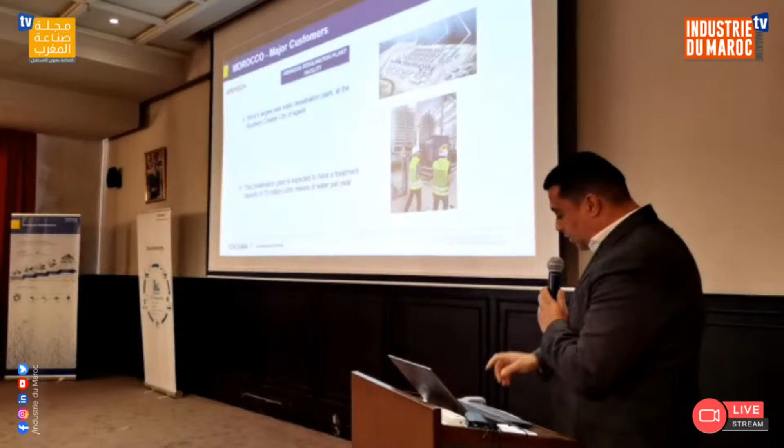Finally, in conclusion, what I would like to highlight from my presentation is that we have the local office, we have the local teams, we have enough capabilities in order to support all the projects and developments, not only globally, but also within Morocco. This means we are in a good position to support new markets, new technology, and also with a clear strategy for hydrogen and ammonia solutions.

That was all from my side, just a brief introduction to the local team, that now we are in Morocco and we have the team and the staff that can support correctly. Thanks, thank you all.

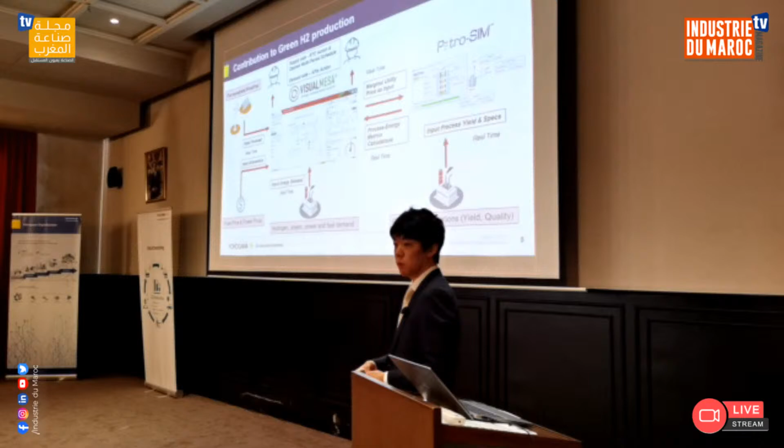Today our professionals from KBC will introduce the details. But not only the control and sensing layer - we understand there's a need for optimization and simulation so that stakeholders can study how to efficiently operate the hydrogen production plant. So we have a solution for simulation technique, and also energy management to efficiently operate your plant. We already have a concept. In the field side, we have many sensing technologies and controllers, such as flow meters, pressure transmitters, and IIoT sensors. We also have in-house AI developed by Yokogawa, which can contribute to any industry including green hydrogen production. This slide shows the electrolysis package.

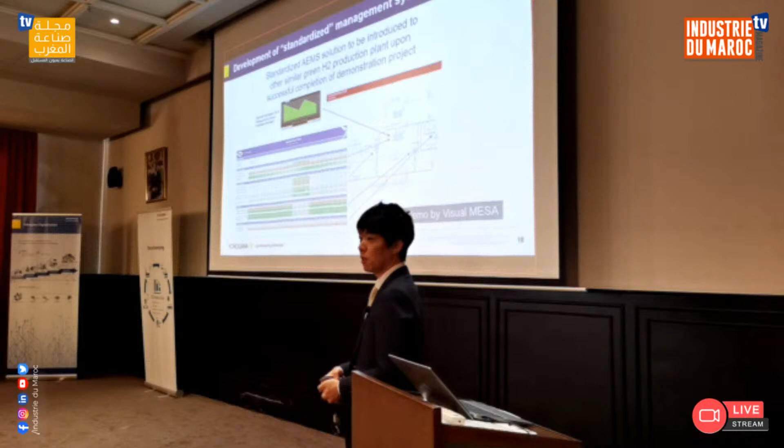What I want to say is we are really involved not only in commercial projects, but also this kind of challenging project, so that we can expand our contribution to the customer. This is the last slide. Even if we are successful in the demonstration project, if it is really fully customized, it could be difficult to introduce to the customer. So we are trying to utilize our platform so that we can somehow standardize it as much as possible, so that we can accelerate introducing other stakeholders for the scaling up of green hydrogen society.

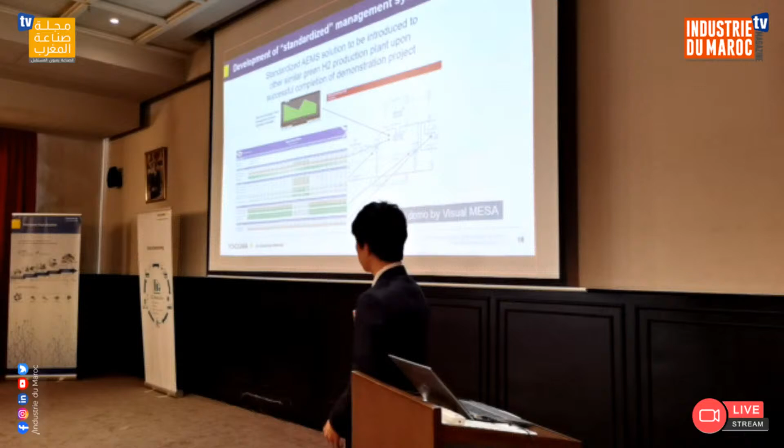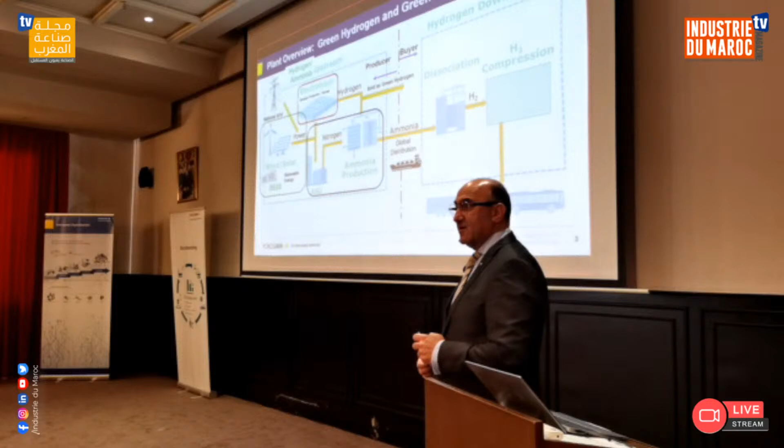So the least amount of integrated control system required is actually the electrolysis unit itself, because that is purchased from a license holder, from a patented company, which will come along and put that in. But it is all the added process units with regards to water processing, filtration, and power management that create the requirement for an integrated control system and all the software that goes on top.

So if I simplify the elements that go into that operation, we have the upstream power, where the power is from solar, wind, we've got the battery, and we've got the power and flow management.

Now, sometimes the power is remote, and we would require that the power generation, the wind farm or solar farm, could be a distance away from the ammonia production or hydrogen electrolysis production, and therefore we would require transmission management and contingency management, and overall we would require an EMS system with respect to the mini grid you have set up to generate your power. So what I mean by mini grid is this grid here, not the main grid bringing the power in.

But you would need an energy management system to be able to manage that grid and make sure that it's optimized. So that all goes into that element.

Then we've got the green hydrogen. Now, electrolysis systems work in various mechanisms, so I don't want to get too far into that element. Obviously, it comes as a package from an OEM or a license holder. And we would need auxiliary systems that support that green hydrogen electrolysis, the compressor, and the storage to hold the hydrogen, because a storage mechanism for the hydrogen is required by itself to allow for the peaks and troughs of the offtake of that hydrogen, both for ammonia and for the export line.

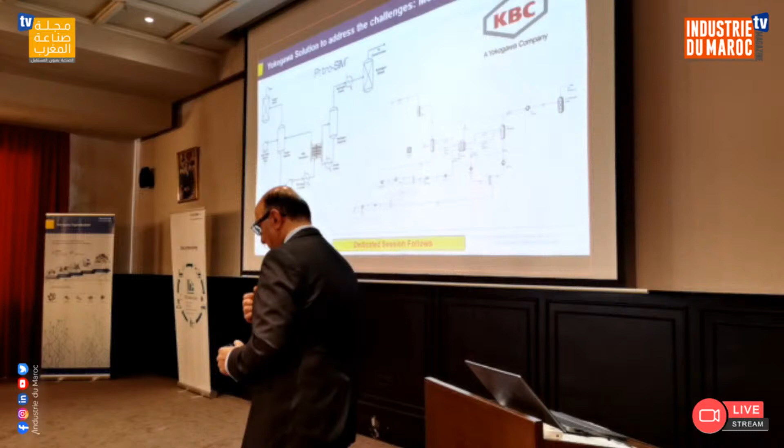Some of our companies—there's a company called KBC, you will have a presentation later in the session regarding our simulation of the electrolysis and the systems itself. So we have modeled, both steady-state and dynamic models coming out of that electrolysis processes using our product called PetroSim.

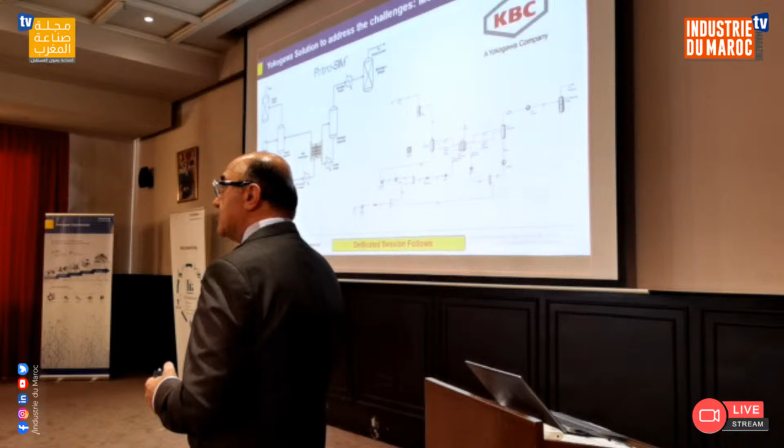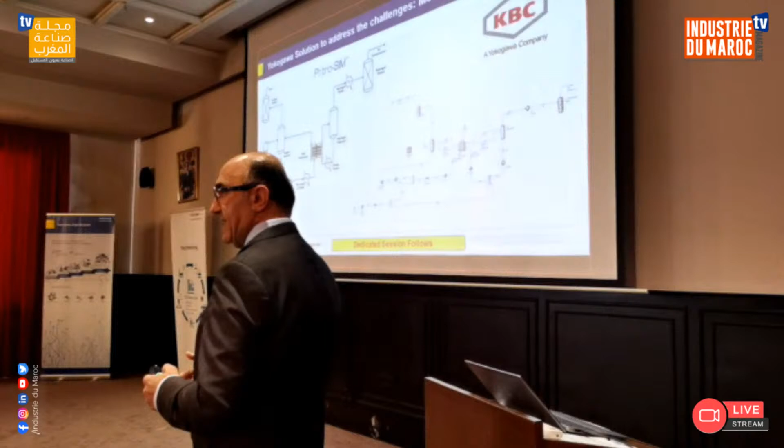That PetroSim session will come along, but we are working towards the analysis and modeling, which means that based on that model, you could have an operator training system that mimics the live plant, and that operator training system can be used to quickly develop operators on a new process and bring them online quickly and get the production consistent. It also helps with the overall design of the dynamics of the plant.

For the green ammonia itself, you need the reliable control system, the instrumentation, modeling, simulation and optimization to work. We've done a lot of work, as my colleagues mentioned earlier, with respect to our APC algorithms that were co-developed by Shell and ourselves, and has been rolling out to a lot of the installed base, along with modeling, simulation, optimization, and integrated compressor control.

So all of those elements for the green ammonia are listed on the side, and are available with Yokogawa already—field instrument analyzers, DCS, embedded compressor control, APC, process digital twins, operator training simulators, and the EX. All of the products are available, and we have been involved with ammonia production from day one, the last 50 or 60 years globally.

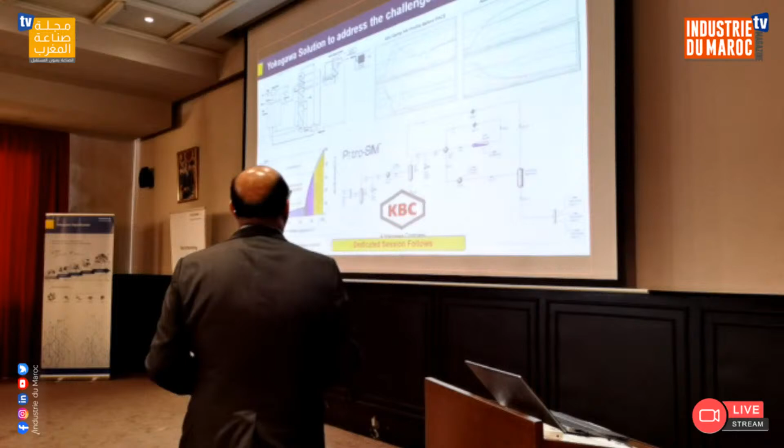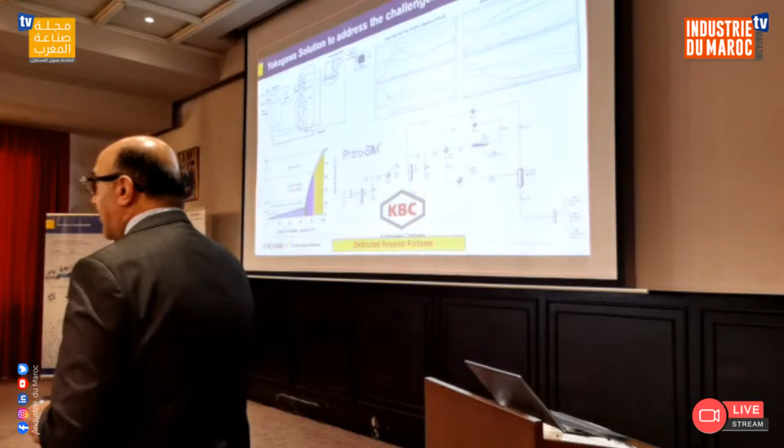Obviously, what makes it green is the energy that goes into that ammonia production. But overall, the ammonia production unit itself is the same as elsewhere. Our APC and optimization session will cover that element. The APC and optimization is critical to bring down the cost of ownership—we cannot have an ammonia and hydrogen production plant where the parameters are not tightly controlled and the KPIs are not clearly defined. So the APC and optimization is a critical factor in the overall cost.